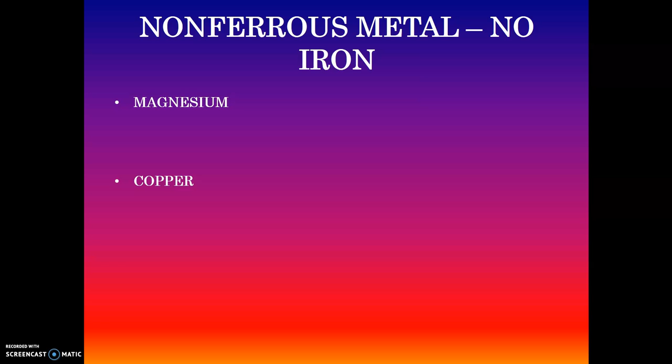One is magnesium, another is copper. With magnesium, it has high strength to weight ratio, excellent machinability, and chips. The only bad thing about it is chips are highly flammable.

Copper, obviously the oldest known metal. Kind of a brownish color to it. It's a good conductor, and you can shape it easily because it's fairly soft.

Titanium, strongest metal out there. Strong as steel, but only half the weight, and highly resistant to heat. They use titanium plates on the space shuttle, the heat shields and stuff like that.

If you watch Apollo 13, they talk about that. If you watch Hidden Figures, titanium plating comes up. So that's where you would see titanium being used. Nowadays you see it on golf clubs and stuff like that.

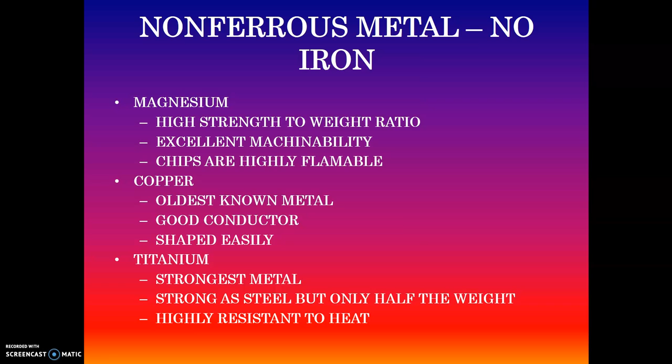Beryllium, used in nuclear applications. That's all you need to know about it. Pretty much the government controls beryllium like it's their business.

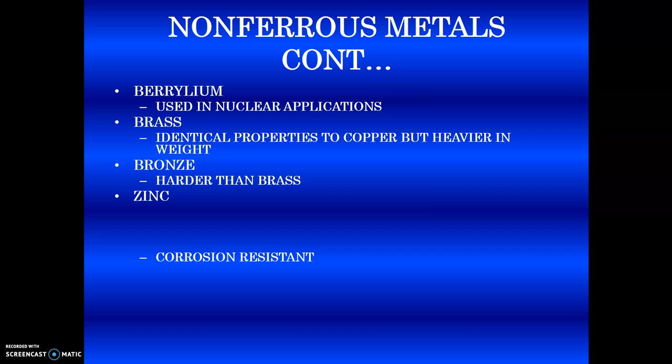Brass, identical properties to copper, but heavier in weight. Bronze, harder than brass. Both brass and bronze have basically the same color, one's just a little bit darker than the other.

Zinc is resistant to corrosion, and it's usually used as a protective coating for steel, thus the term galvanizing. So if you buy something that has galvanized on it, you probably have something containing zinc.

Tin, we will use tin in class here. That's also corrosion resistant. Pewter, you're looking at decorative stuff. Nickel silver, same thing, jewelry, stuff like that.

Now, the one we haven't talked about is aluminum. Aluminum is probably the most common non-ferrous metal out there, with universal usages. Some characteristics about it: it's soft, you can machine it easily, and it does not rust.

And there's a lot of it, really. I mean, all our projects, the majority of them will be out of aluminum because it's easy to work with.

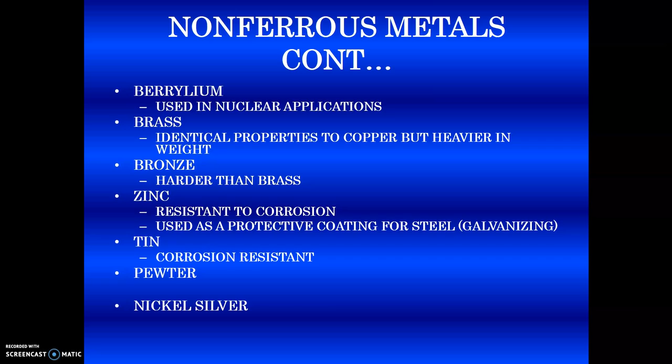Precious metals. Everybody knows what the three precious metals are: silver, gold, platinum. Our economy is based on these three items. The amount that we have of everything dictates our money situation.

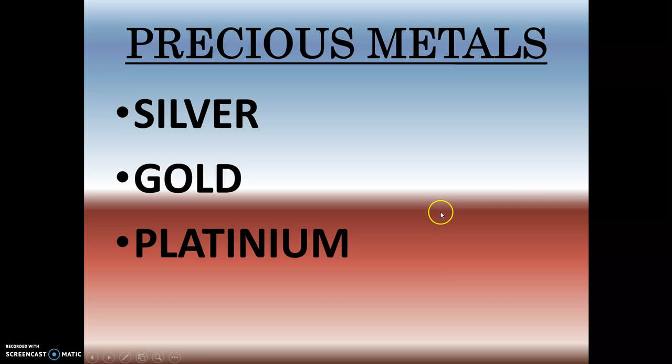Tantalum, this is used in rocket nozzles and heat exchangers in nuclear reactors. Once again, all these high temperature metals need to be used in aerospace or the nuclear field.

Nickel-based alloys, used in rocket engines, jet engines, and electric heat treating furnaces. Now, this is where you'd see it in real life.

And then tungsten, this is used in welding and rocket engines. Now, tungsten's in both ferrous and high temperature metal categories, so make sure you're aware of that.

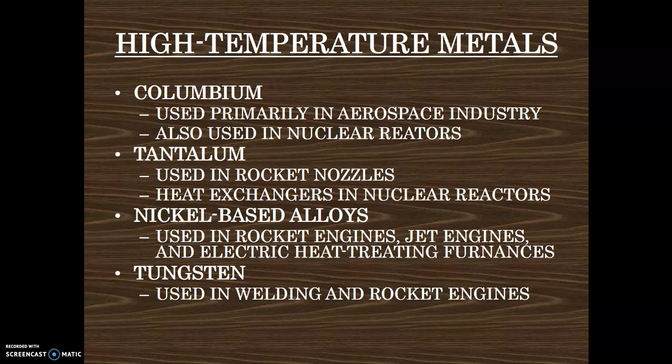Now, rare metals. Here are a few of them. There's others, but cerium, and I even got some pictures here for you, europium, and yttrium.

Basically, yttrium—now, I've looked all over for where these are used. We're looking at lasers, old televisions, picture tubes had pieces of rare metal in them. They're very good conductors. But basically, the government has control on pretty much all of this.

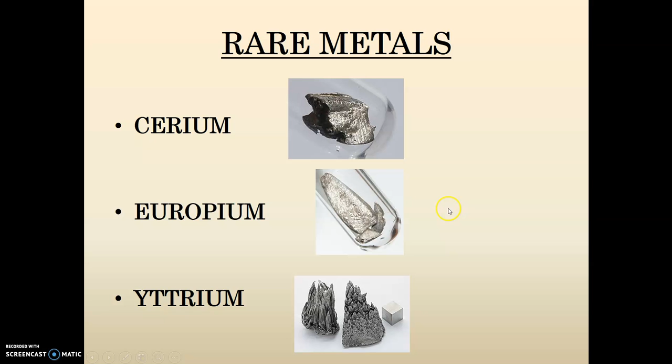Now, something new that's come out in the last few years are called honeycomb structures. These structures are made up of sections of thin metal. These sections are bonded together to form a structure similar to a wax comb that bees use to store honey.

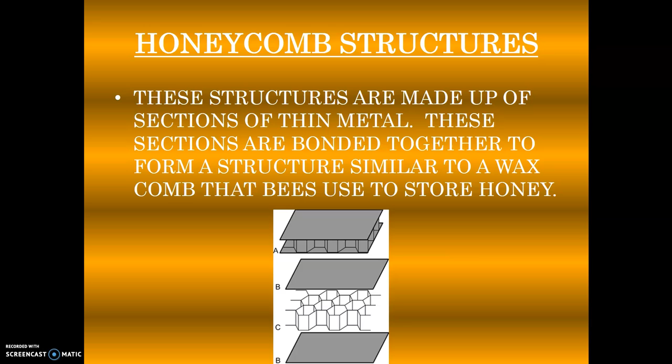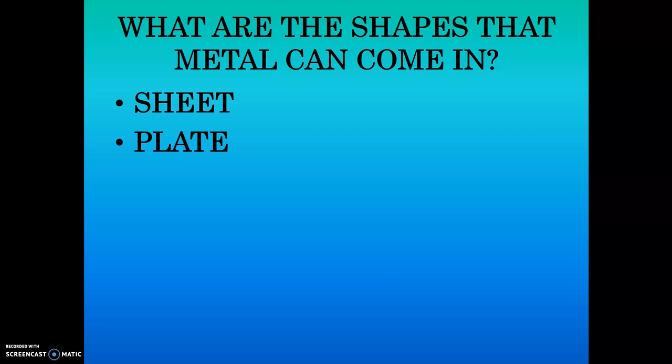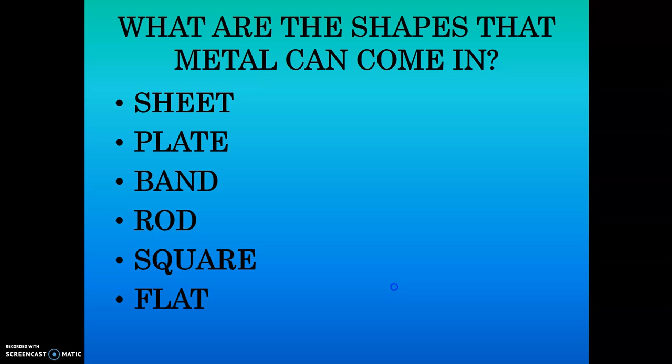Now, what are the shapes that metal comes in? You have sheet, you have plate, which they're different, band, rod, square, flat, hexagon, octagon, angle, channel. The last one being I-beam.

Now, in all of our classes and all of the class that we go through, we will use sheet, we will use band, rod, square, flat, angle. The rest of them you probably won't use, but I'm sure everybody's used a screwdriver at one time.

That would be a hexagon piece of metal that you've used. It's formed into a screwdriver. Allen wrenches would be another place you would use it.

I-beams, probably won't use them. I've had one, but we cut it up. But you see them, they're used in buildings—you know, NCI Cornerstone down here works on that. Channel, I do have a couple pieces of it, but we're not gonna use it in class.

Angle iron, you're gonna use that when you're in the foundry. If you get into advanced manufacturing too, you'd probably use it too. Plate, probably not gonna use it—I do have some plate pieces in the storage room.

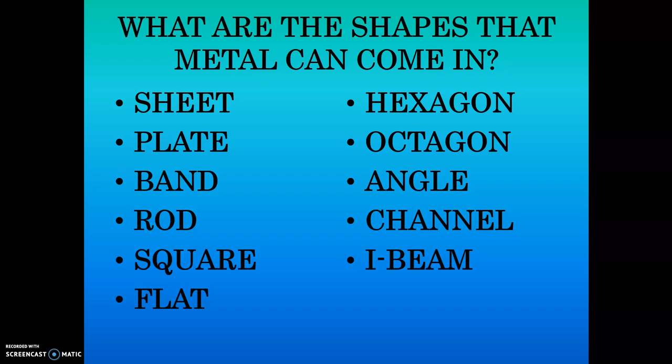The band, you're using that for the bandsaw—all blades can be made out of that. Rod and square, you're using that in your tack hammer. Flat, you're going to use that on your thread gauge. Sheet, you're going to use for your dustpan. That's it, that's all the notes.